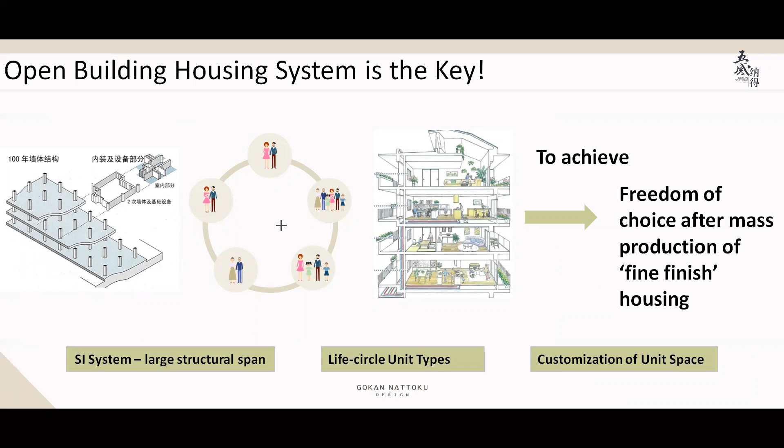So the question is how to make more choice for the fine finished commercial housing in order to accommodate diversity of living style. This is an important task for future city housing in China. And we believe the open building housing system is the key, because it provides an SI system with open space and open structure, and it is possible to create a diversity of housing unit types to accommodate the long living period of the family. So we believe it will achieve freedom of choice after mass production of fine finished housing in China.

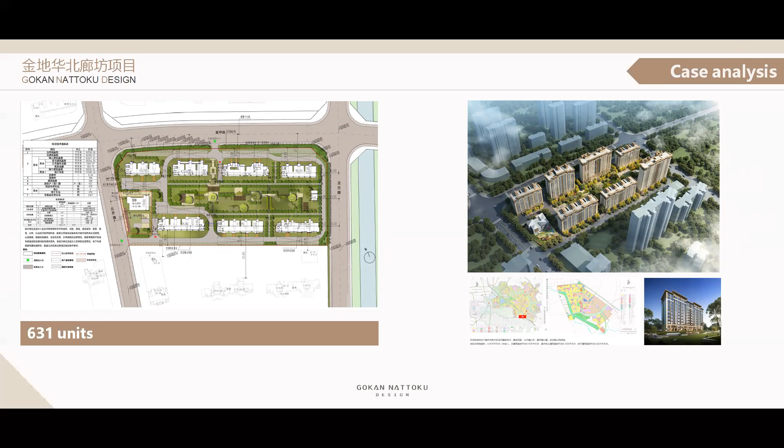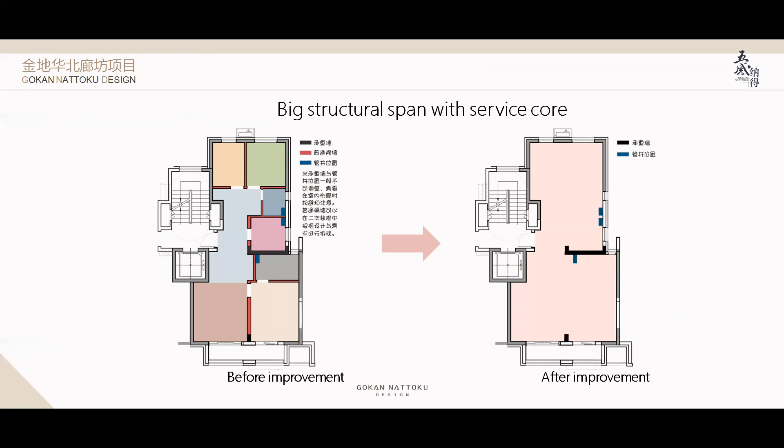Practice one, Jindi in Langfang. This housing estate accommodates more than 600 family housing units. On the left is the original unit plan, in which every function, room and the service core is very much fixed. On the right-hand side is the improved unit plan, where we rationalize the layout of structure, dimension, and the location of the service core. And it is possible to make a larger span structure to accommodate different layouts.

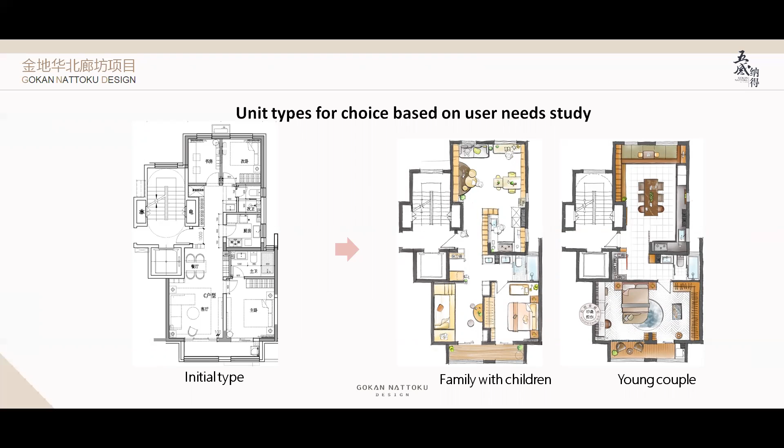On the left-hand side is the technical plan of the initial design. On the right, you can see we put it on the housing market in the comic style, with a family with children on the left-hand side, and another unit style for a young couple. You can see the two housing units are very different. For instance, this is for a young couple who like living by themselves. So they can create their own place by participating in the design and in the choice of the housing layout.

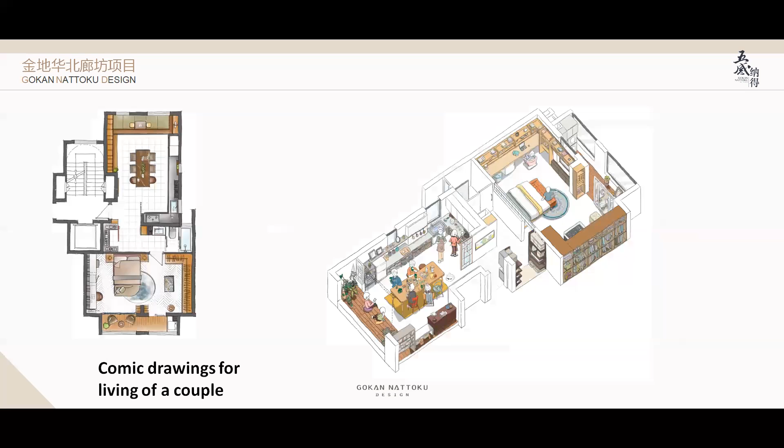These are the comic drawings we put forward on the mass media and on the housing market, targeted at young couples. So people can very easily understand the layout and the living style that they may have. And another example is a young couple with children living together. So the house actually places the children in the center of the family, where they have a large living place for themselves.

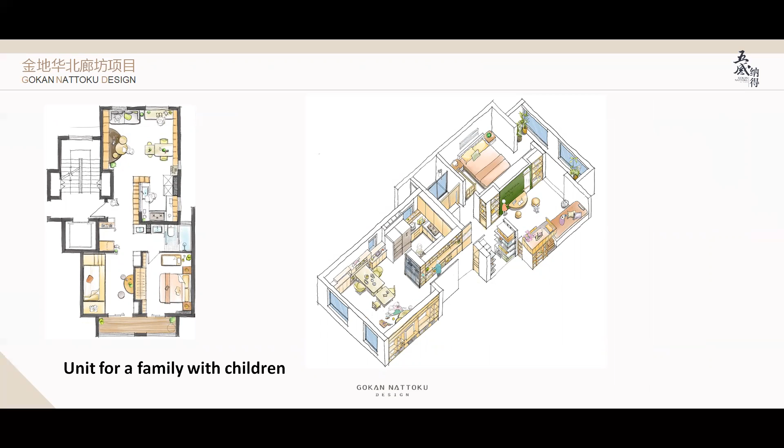The second example is life circle housing in Beijing. It is a national program to promote life circle housing, which is housing that can last more than 100 years. Fortunately, our company participated in this program. So we integrated several concepts, such as the open building system, prefabrication, prefabricated fine finish, and the life circle unit typology.

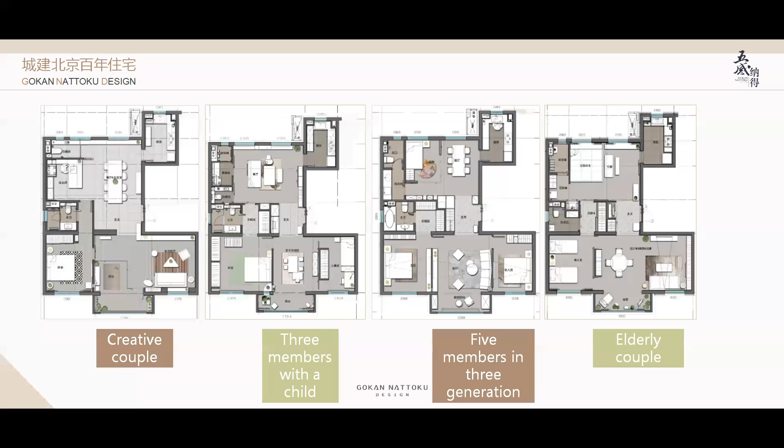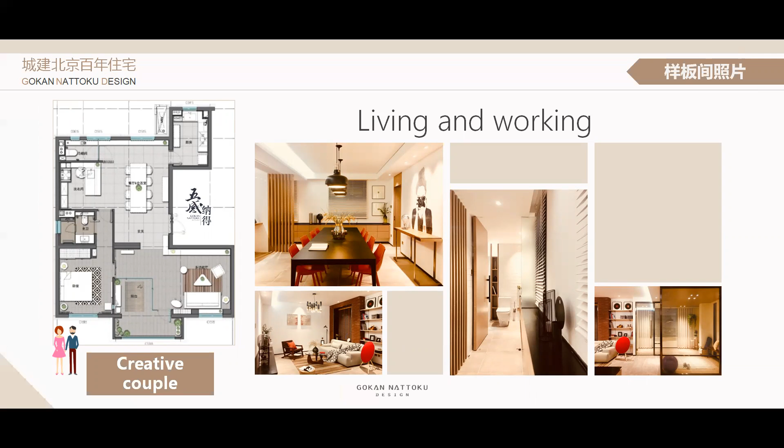So there are many possibilities to create a living unit. Here we take 4 examples: a creative couple, 3 members with a child, 5 members in a 3-generation family, and an elderly couple. Living and working is the prototype for young couples. They can live and work in the same place. This is for a family unit. The layout design puts children in the family center, and decoration and furnishing styles also try to accommodate children's needs.

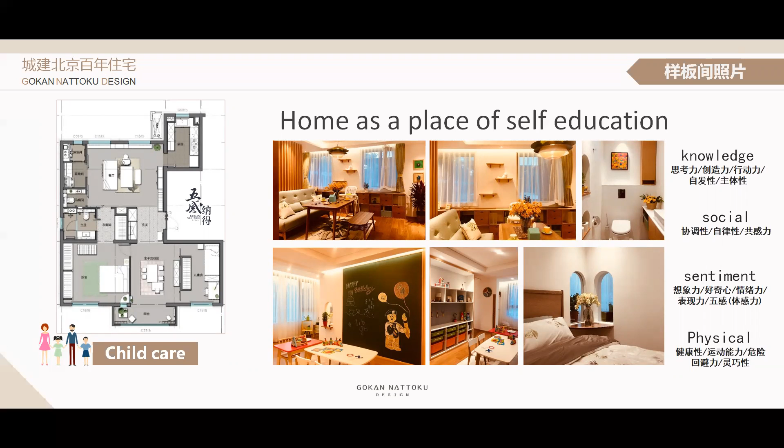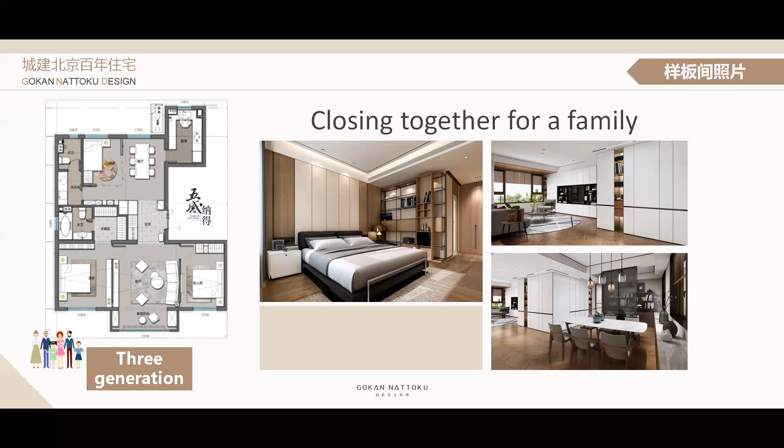The 3-generation family is also very common in China. So in this floor plan, you can see within the same structure, we can achieve a life with 5 family members living together. And finally, there's an example of living within the same unit, but for a young elderly couple. So they can stay here until they are very ill, accommodating a slower living pace, and they can even accommodate a helper living in their house.

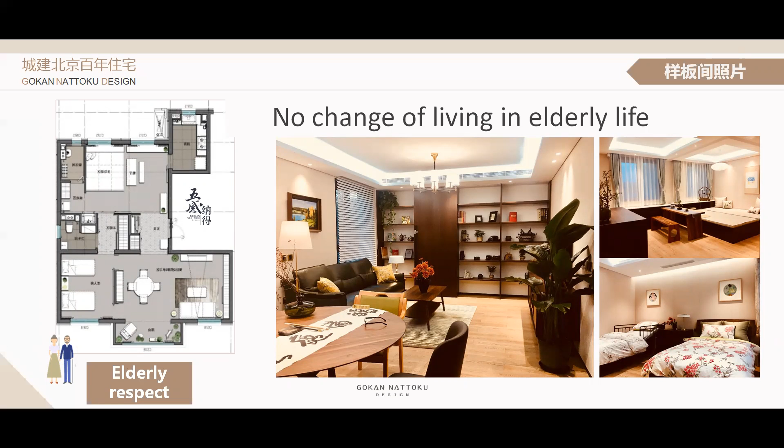Finally, we believe living quality is getting more and more important in China. Individualization and diversity are part of the qualities required, and housing supply needs to accommodate these needs. The open building concept and open building technical strengths will help us to design and develop appropriate housing products in the future.